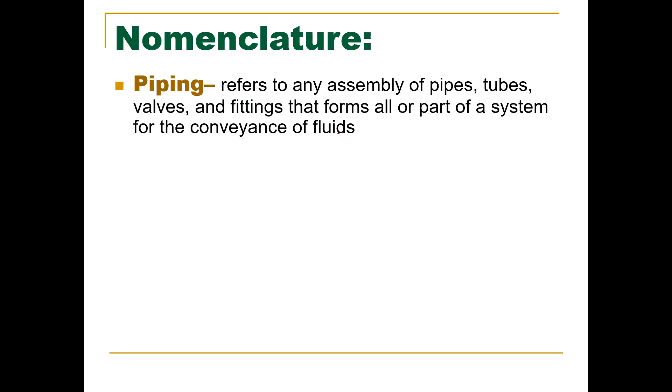All good? All right, so next topic is piping. Piping refers to any assembly of pipes, tubes, valves, and fittings that form all or part of a system for the conveyance of fluids. Pipe refers to the non-flexible fluid conductors designated by diameter and wall thickness, strength, or schedule. Most of the time you will hear it referred to as schedule.

Tubing can be, and usually is, bent at installation. It's more flexible than pipe and is designated by nominal outside diameter and wall thickness. Fittings are devices employed to join sections of pipe, tubes, or hoses in a piping system.

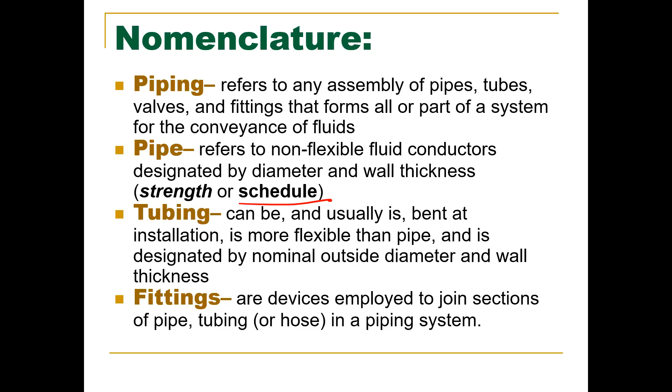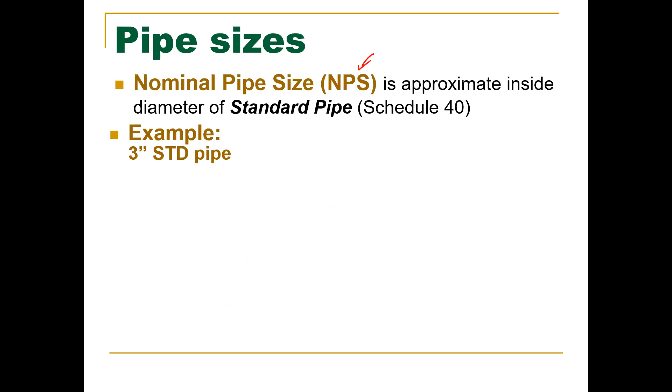Now, nominal pipe size, or NPS, is an approximate inside diameter of a standard pipe. So, Schedule 40 example: we have a 3-inch standard pipe. Its outer diameter is 3.5 inches, its inner diameter is 3 inches, and its wall thickness here is...

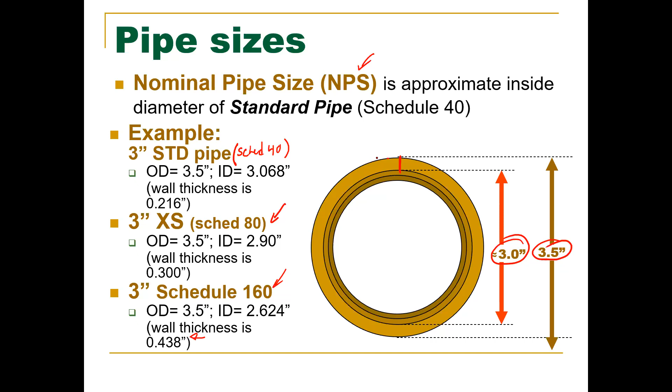0.216. If we go up to Schedule 80 from this Schedule 40, the outer diameter is still 3.5 inches, but its inner diameter is now 2.90. And then we have a 3-inch Schedule 160 with a wall thickness of 0.438. Notice how the outside diameter has not changed, only the thickness of the wall has changed.

Student: When you're talking about pipes in general, do you use the inside diameter, correct? Like just a standard pipe and the thickness? Professor: It depends. A lot of the time, what you're going to be talking about is schedule, which is for the thickness. No one's going to be talking about a 0.216 thick wall, everyone's going to bring up what schedule it is. When you get into the crazy world of wall thickness, that's when people start talking about wall thickness and outside diameter.

And the reason I bring that up is because I worked on a dredge ship. On a dredge ship, we sandblast all of our equipment 24 hours a day, 7 days a week, 365 days a year, because that's our job — we move sand from one spot to another. The entire ship is basically a giant sand vacuum cleaner. We had pipes ranging from about 6 feet in diameter down to something that was 3 feet in diameter, with 3-inch armor-plated steel wall thickness. That was done because we were sandblasting everything, always, continuously.

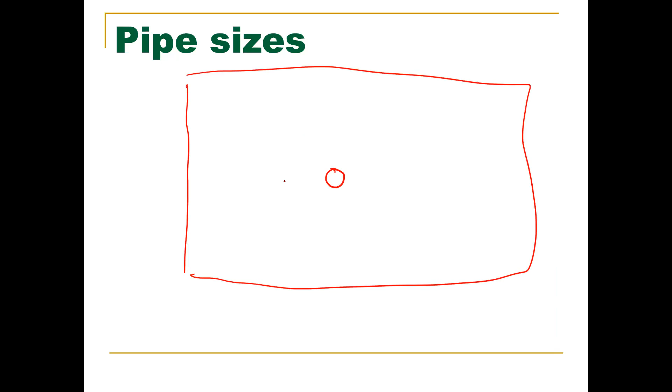Student: Would you do this while the ship's underway or while it's not? Professor: All the time. Student: So how do you replace the pipe if it's that thin, would you just add a layer to it, like a sheath? Professor: Sometimes. If we were doing that job... here, I'll go to this page. That's why it was important that we did these UT scans, because sometimes we would develop a hole or a crack on our pipe. This is our pipe wall with a hole in the side, and what we would have to do is scan all around this crack.

In doing so, we had to find a spot where we could weld. We would grind off this entire area to find it. We would need at least a quarter of an inch to weld. Sometimes this crack would be here, but we would have to put on a 2-foot by 2-foot plate.

Until you find it's actually thick enough, right? Until we can actually weld to it. Exactly. And sometimes when we would grind off paint, we would find little micro holes, little cracks, things like that would develop. It would really throw a wrench in your plan of where you thought you'd be able to weld.

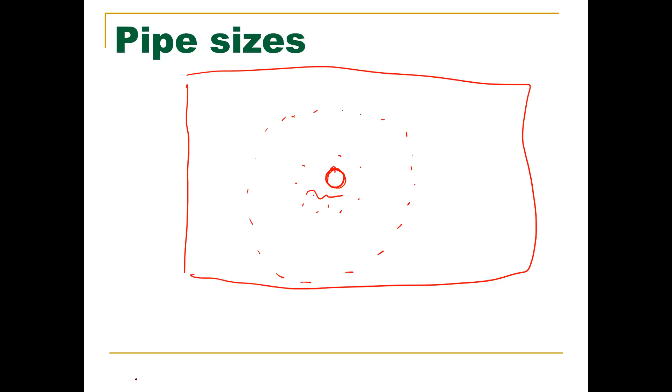Most of the time, if the crack was bad enough—and we've had some really bad cracks—it would shut down the job. We'd have to get our welder, which, God knows, it was always 2 o'clock in the morning when I had to go wake him up. It never happened during the day. We'd have to shut down the entire ship and weld until it was fixed.

A lot of times we had to go into the shipyard.

Quick question: so like a Schedule 40 pipe would be a 3-inch diameter or a 3-inch thickness? So it's not thickness—Schedule 40 is all about the wall thickness. The larger the number, the more the wall thickness increases. You can see a Schedule 160 has a half inch wall thickness, where Schedule 80 is only 0.3, but it's a ratio to what the actual pipe is.

It's not an actual number, it's just the ratio to the size of the pipe, right? Pretty much. Okay, gotcha. Because if you had like a quarter inch pipe and it was Schedule 40, well, a wall thickness of 0.25 is pretty close. So it's always going to be a ratio off of what it is. Schedule 40 is always going to be the smallest, but it's standard, and then you go up to higher and higher.

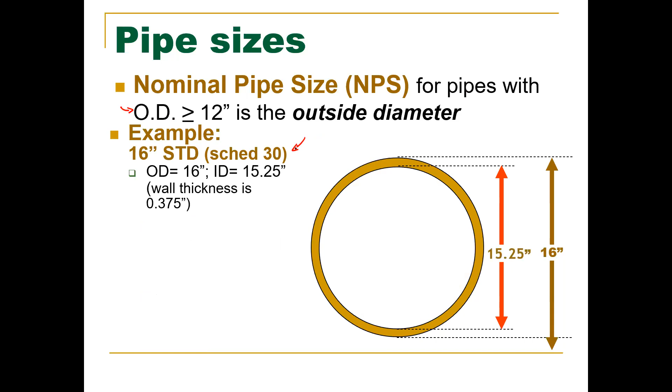For pipes with an outer diameter greater than or equal to 12 inches, it is done by the outside diameter. So Schedule 30 of a 16-inch pipe—the outer diameter is 16 inches, where the inner diameter gets smaller, and so on and so forth.

So Schedule 40 basically has a full half inch thick wall, and then Schedule 160 goes down to a 1.5 inch thick wall. Notice again, this outside diameter has not changed.

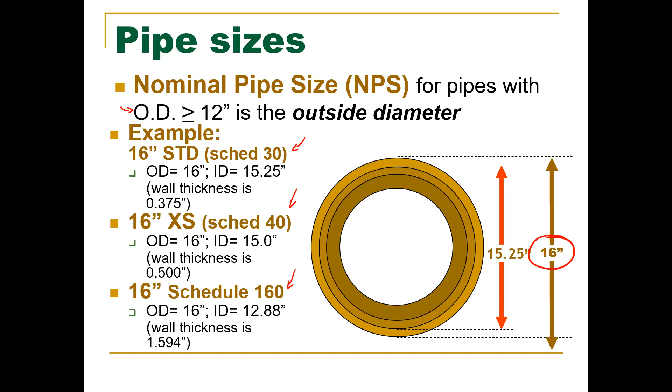So outside diameter in 16ths: a number 12 tube has an outside diameter of 3/4 of an inch. A number 16 has an outside diameter of 1 inch. Most of the time, people aren't going to go with number 16 or number 12—it's going to be a lot of just its outside diameter, or also this wire gauge, which they'll talk about. The wall thickness is in a decimal or in the BWG wire gauge number.

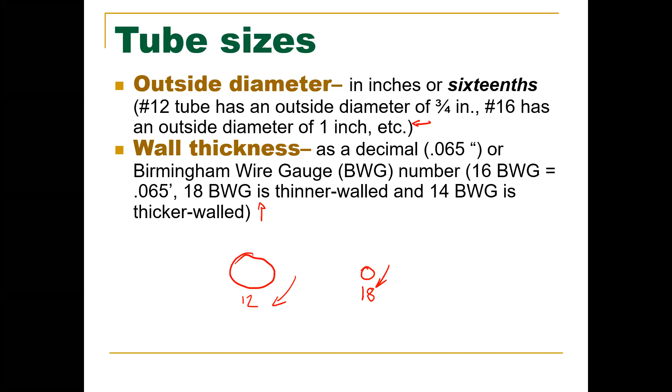Same thing with wire gauge: 18 is going to be a small wire, thin walled. Or if you have a 12 gauge, it's going to be a thicker wire, thicker walled. So the smaller the number on the wire gauge, the thicker the wall and the thicker the wire. The higher the number, the thinner the wall, and the smaller the diameter of the wire. It operates the same way.

Copper tubing kind of falls into its own category. It's still considered tubing, not really pipe, but it also utilizes fittings, whereas tubes utilize bends to go 90 degrees. Copper tubing can use either bending or fittings, so it's in its own category of both.

It's designated by slightly different parameters as well—it utilizes the nominal outside diameter. So a 1-inch copper tubing has an outer diameter of 1.125, but it's called a 1-inch pipe. Same with 3/4, 1/2 inch, and all that kind of other fun stuff.

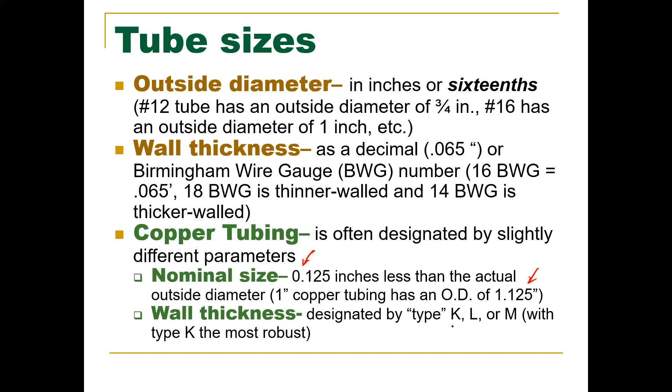Wall thickness is not designated by anything other than a letter - K, L, or M - with K being the most robust. So it has a thicker wall. The material it's made out of can take a little bit more of a hit.

The example I use is I just had to replace a half inch copper line in my garage that goes to a water spigot. Because it's exposed, I wanted a tougher type of copper, so I went with K because it's outside - well, not fully outside, it's in the garage. It's an attached garage, but if we forget to turn the water off in the winter, it will have a lower chance of freezing and busting the pipe open because it's using a thicker wall, it can take more forces.

The other thing is that it's exposed, so it can get damaged, and we don't want this thing to get all banged up, like when we hang things or get the car in, stuff like that. So we went with a type K so it can take those damages. So things to think about - it's not just about wall thickness, but what it's going to stand up to.

So, we use mostly the type K. I'm sorry, say again, you're breaking up. I'm saying, we use mostly the type K, since it could be outside. So I used all type K in that piping - it's the most robust of it.

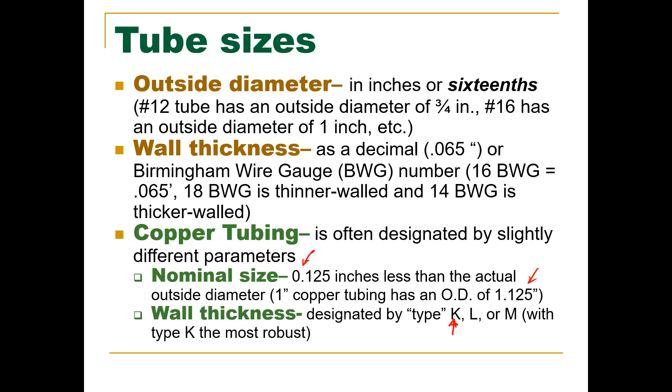So, piping connections - we can weld them. This is called a butt weld. It utilizes a V groove, grooved out at about a 45-degree angle.

Most of the time when you buy a piece of pipe, both ends will be V grooved, unless otherwise designated - you would have to go buy something that's not V grooved. If you cut a piece of pipe to length, you'll have to V groove it out yourself. There's no special tool, it's just a grinder.

This V groove is there for a specific reason - it allows you to stick an actual welding stick into the area. It gives you more surface area to get that weld on. If you were to just weld on two pieces of material flat up against each other, you would not have enough surface area and it wouldn't give a nice deep hold - you wouldn't have enough penetration into both sides of the metal.

Mr. Callahan, what's happening? Would you say that the V groove might make the weld a little bit weaker, considering it's not completely welded straight through? Because the way I'm looking at it, that groove there - if it was completely welded from one side to the other, I would think that groove being there might not make the weld as structurally strong.

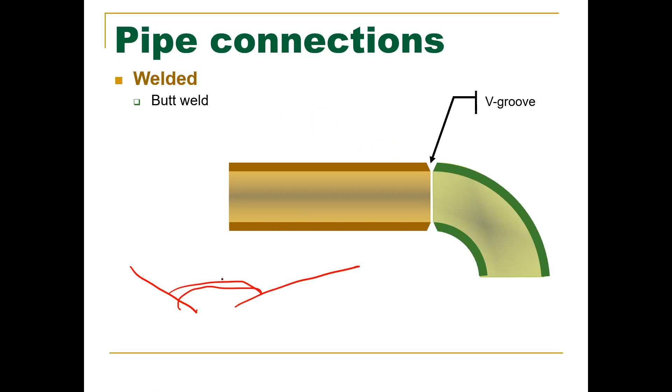So a wider area equals a stronger weld? Not always. It's not like you'd have a 22-degree angle with this long bead. But there is a point of no return. Just given that surface area, you'll be better off. A lot of the time you can actually have spots where you'd do a triple weld, where you'd have a base bead and then put on two more beads to increase your surface area and spread it out. Okay, got it. Thank you, that was a good question.

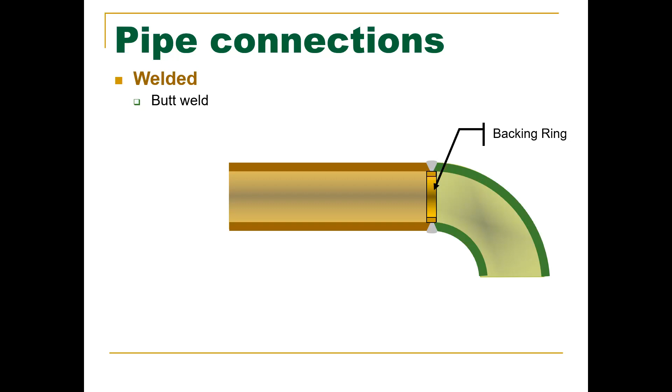There's something here called a backing ring. Anybody who's taken the welding class can say different, but never in my life have I seen a welder, or myself, use a backing ring. Never. From what I can tell in my own research, backing rings are basically there to keep the weld in place. But in reality they are consumable, you can't reuse them. Because if you're welding a pipe together, are you going to be able to reach in there and grab that backing ring out? No. So it's pretty much worthless. I've never seen anybody use it.

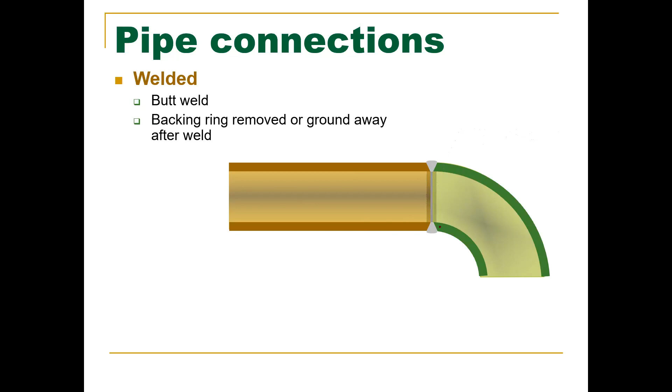So the weld itself is in there, it goes all the way around the pipe, in that V-groove. Another way, which you tend to see a bit more these days — not so much these V-grooves, they still exist — is some sort of collar. You can see there's no V-groove. You can cut piping easily, you don't have to worry about grinding anything away, it's just a straight cut and welded up.

Now you can see right here there's a little space, a little air gap there. What is that for? For a seal or a gasket, maybe? Nope, it's not for a seal or gasket. Remember, this is the actual seal, there is no gasket, this is a welded seal. Is that for the weld to seep in a little bit, to get into the actual area? Or so it doesn't bind the pipe there, like to replace it if you need to, I guess?

Not for replacement, and it's not for the weld to seep in. If the weld seeped in here, you could have a problem where you'd have weld dripping in, blocking your flow. Does it have to do with expansion and contraction with temperature? Exactly, just that little bit of room for expansion.

If you're turning this on — this is a boiler — we have 600-pound steam coming out of here. Turning it on for the first time, let's say it's summertime, more than likely it's a cold ship, probably 70 degrees, this piping is cold to the touch. We have 600 degree steam coming right through this. What's going to heat up first, the piping or the fitting? Yeah, the piping. And it'll be a gradual heating up, not instantaneous.

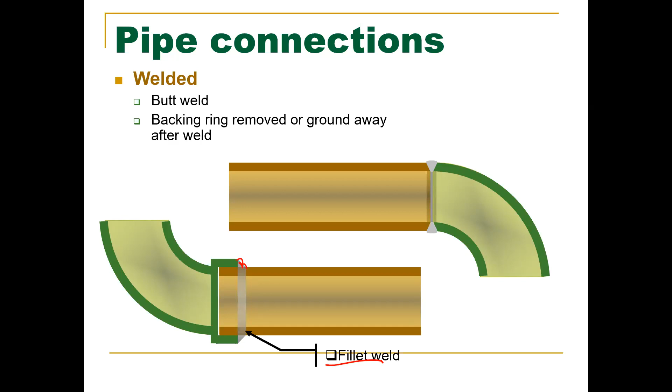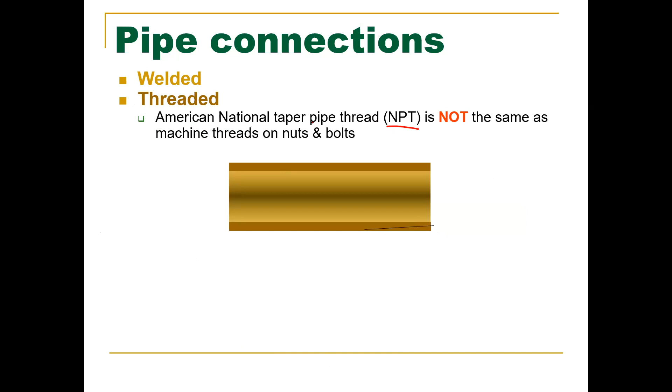Now we have threaded. Threaded is using the American National Taper Pipe Thread, or NPT. It is not the same as a machine thread for bolts, nuts, and all that kind of stuff. We notice we actually have a slight taper to our threads as well. Now, for nuts, bolts, machine threads, that's TPI for anybody who's curious. Threads per inch.

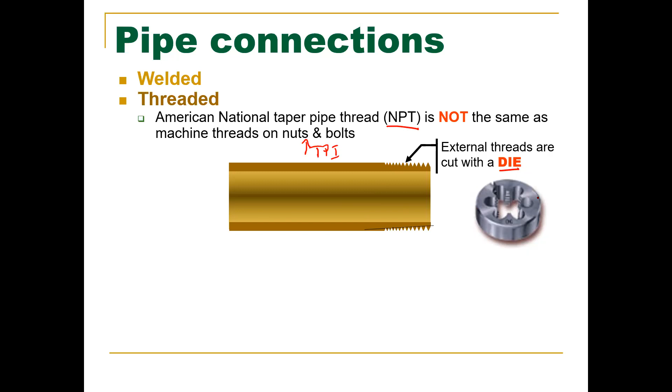So external threads on here are cut with what's called a die, D-I-E. It utilizes internal threads to cut the external threads of a pipe.

So if you ever made your way into the machine shop on the ship or in the classroom on land, you'll see these hanging on the wall. That's basically where the die gets inserted. They are ratcheting, so that way you don't have to swing these things around. They tend to be very big and large, because cutting taps and cutting threads is not the easiest thing in the world, so you'd need a lot of leverage.

And then you have what's called a tap. Taps cut with an external thread to make internal threads. And we can see right here in this space and in this space, we're missing threads. It's actually pulled back away. Why do we have that? So the metal shavings can get stored in there while it's being tightened and loosened so that it doesn't affect the threads being cut. Exactly.

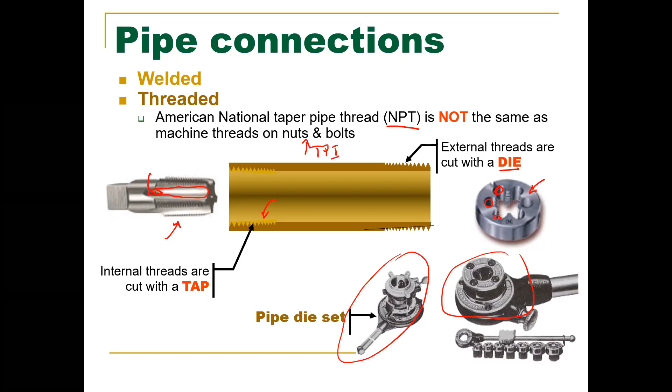So we're removing material. It just doesn't poof off and go to Neverland. We are removing it. It needs to go somewhere. All right, that's our threaded.

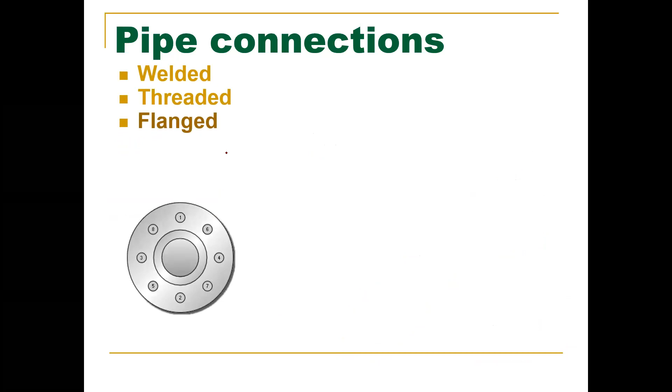And now we have flanged. Flange is usually what you'll see the most on high pressure and low pressure systems, especially if it was built by the shipyard. Welded is for fittings and stuff like that, but for like straight pipe, you usually tend to use flange. So flanges are great, but they are kind of in their own little specialty.

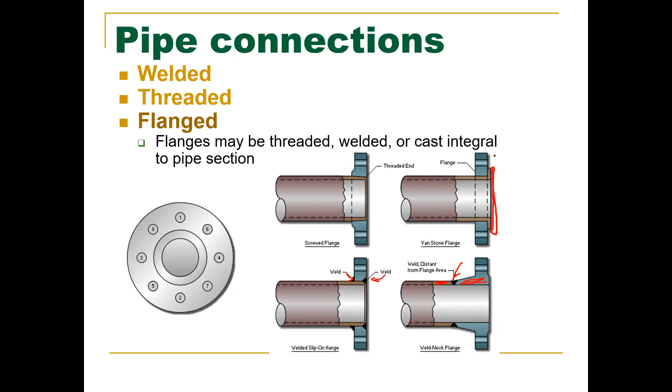Now, with flange comes gaskets. This is the spot where we see our first gaskets. So for LP, low pressure, you can use rubber, paper, flexible graphite, synthetics, things like that. For paper, the world's best gasket material is charts, old charts. So if there's any mates in training here, and someone comes asking you for chart paper that's an engineer, don't be alarmed. This is what they want to use it for. It makes fantastic gasket materials. And if you need a wrapping paper, it does really well for wrapping paper too.

They are done with bolts and nuts. Now you can see the animation there. Watch the animation on this side. You see how those are turning gray? And they're going in what's called a star pattern. Why are we not just going in a clockwise pattern? Why would we go in the opposites?

It needs to seat properly. Exactly, even. And so it's even. Yeah, even tension, like on a wheel on a car. Exactly. If we didn't do that and we had two flanges like this, and we did all the bottom ones first, we would end up splitting it and making it a V, and now all the fluid is just going to come out of the top, or the bottom, whatever side you decide to start on.

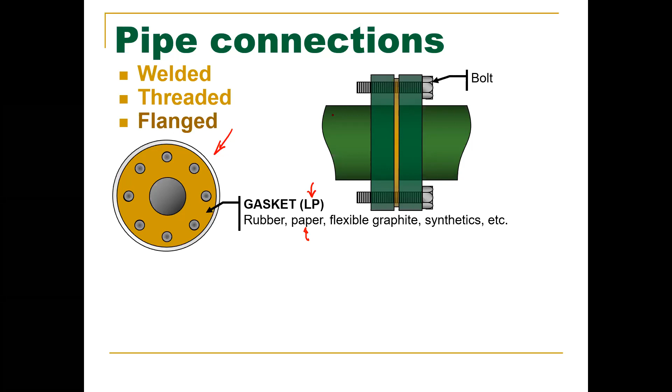So it has a bolting pattern, not only for insertion, but also when you are actually tightening it down or torquing it down. Low pressure sides can use a bolt and nut. You can also use a stud with two nuts on either side. But with high pressure, you have to use studs. Again, here's your bolting pattern. 1, 2, 3, 4, 5, 6, 7, 8 right there. Pretty much a star pattern. Always just do your opposites.

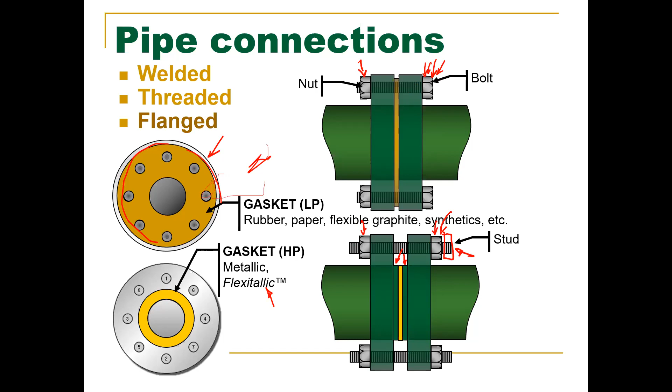We are training to be engineers on a ship, not on land, right? So what happens when you're on a ship and that ship hits a wave and all the way in the bow, and the engine room's way back here? What happens to the ship? Is it all going to move at the exact same rate? It's going to deform. It's going to twist. It's going to contort in two different directions sometimes.

So if you had a straight piece of pipe and something's just going to basically twist it like that, what do you think is going to happen? Snap or break or something. It's going to snap or break. Exactly. So remember, just because we're thinking things are not going to move, we have to remember everything is dynamic—it all moves, sometimes at different rates, especially on the longer ships.

This might be physically attached to a bulkhead and not actually a piece of equipment, and that's going to move like hell compared to what is happening as far as equipment. When you guys get out on sea term, go down to that shaft alley when we're in some rough seas—you'll see the entire thing shifting and turning in almost two different ways. It's pretty cool.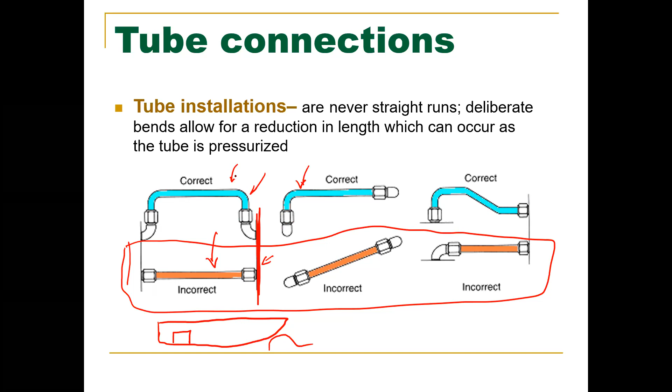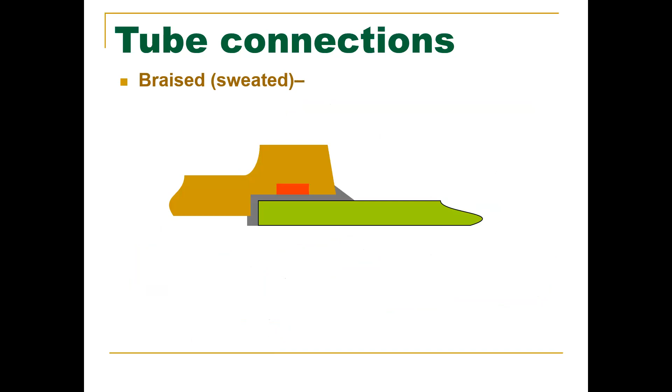So tubing connections, we got brazed, or sweating. So has anybody here done any sort of soldering, whether it be electronics or with copper tubing? Microelectronics, like little things. So the big thing is, if you've done copper tubing, you'll understand this, same with soldering.

So when you're soldering two pieces of wire together, and they're all that stranded wire on both sides, and you want to solder these two things together, you twist them together so they form like a bundle. Now here's the big thing.

How do you know the solder is going to get everywhere? Because that's what you want. You want a really strong electrical connection. You don't want just the outside to be soldered. You want solder within the entire thing because you want the electricity to pass through. If it's a 12 gauge wire, you want electricity to pass through the entirety of that gauge, not just the outside or where it's making contact. So we're trying to make a physical contact here. What do we use?

Flux, right? Use flux. And flux has a great property to it. Who here has used flux with any piping connections when soldering? I have. What does it do when it heats up?

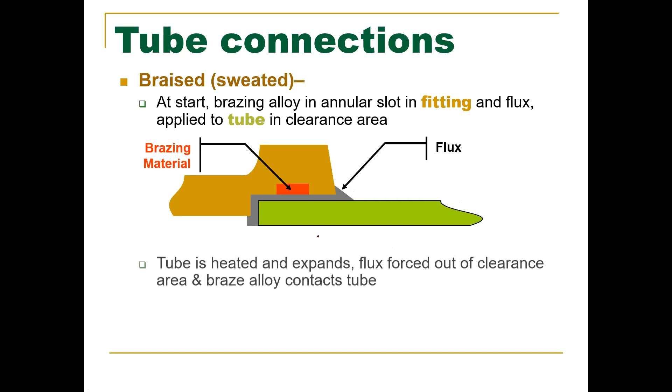So if we look right here, the tube is heated and expands. The flux is forced out of the clearance area and braze alloy contacts the tube. The fitting is heated and the clearance area opens. The flux and alloy flows out, and it'll follow that flux because that flux is trying to boil off right now. Both the tube and the fitting are now heated as the alloy flows, it basically penetrates the entire area.

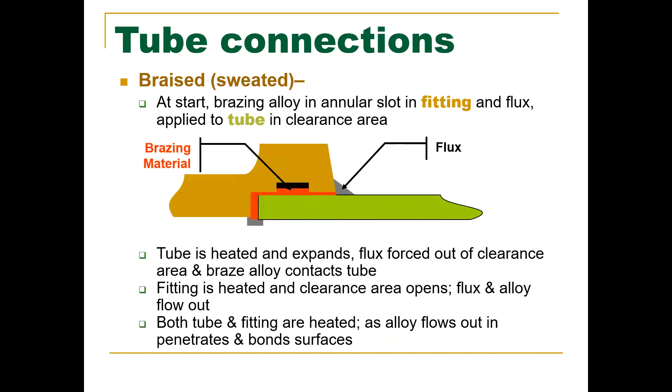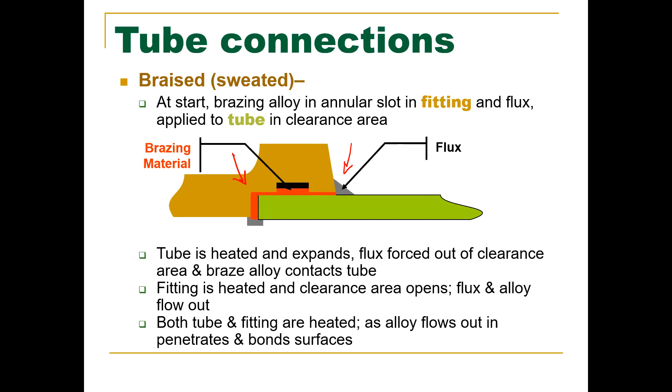So the same thing, it's basically what you're trying to do is heat the entire thing. As that flux starts to boil, you're going to add your solder. And because this fitting is thicker than the pipe, you want to heat that more, which will allow, when you put that solder into it, that solder will follow that flux and fill that entire crevice. Again, this isn't a welding class. Just know that for sweating, flux, and all that idea, that's what it's there for—not so much the method, but why.

Quick question. What kind of piping would we usually use stuff like that on? Because it sounds like it's kind of more of an electrical thing. It's used on copper. Pretty much exclusively copper.

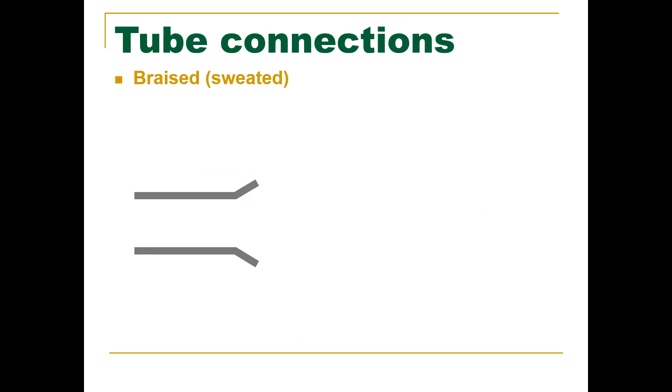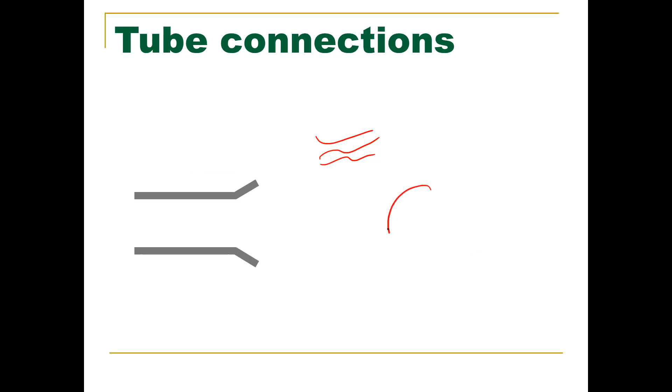I was bringing up electronics because when you think about it, when you're putting all those tiny wires together, you'd have a crevice that nothing would get into, and flux would flow into all of it because it turns into a liquid. It's the same thing on the outside of a pipe. If you have flux on the outside of your pipe and you heat it up, it will start to become a liquid.

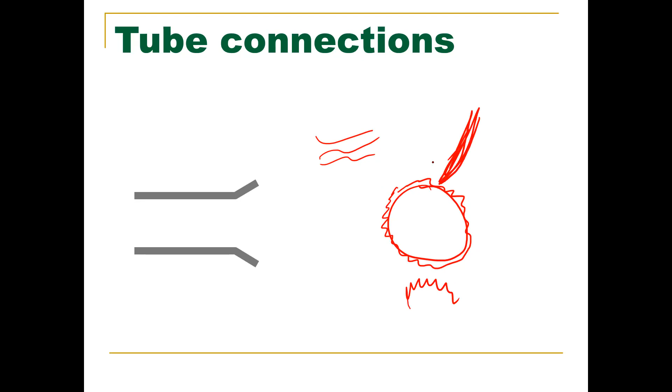And then as you add the flux to the outside - that's my flux stick - it becomes liquid. Gravity will flow, and it will flow downwards towards the heat, and the flux will go that way. The solder will follow it.

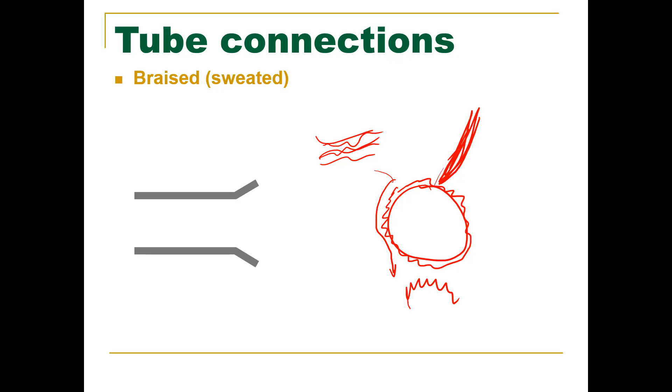The wire analogy was because you can have that whole wire - basically it's the same idea, just using a different type of solder for a different application. But we're not using wires here, any kind of electrical equipment, this is just for piping. It's more to picture it - if you were to have those pieces of wire, how would you be able to penetrate deep into it?

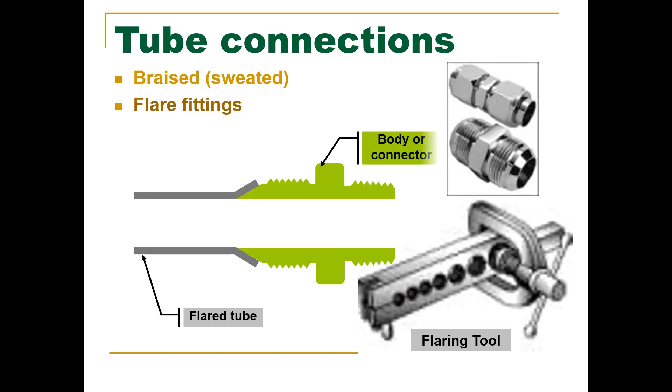So we also have flare fittings. This is my flare fitting tool that I have right here. It's the same thing as the one in the picture.

You put these two pieces together with your tube inside of it, your copper piece of tubing. And those two pieces will now flare out whatever copper is in there - it will push the material and actually force it to become flared. So you can see that it will flare out this tube right here and here using those two tapers.

Now, a lot of engineers don't like these. Why do you think we wouldn't like these as engineers? They work for a little while, but they don't work as long as other pieces of equipment out there. Does it create weakness in the bend?

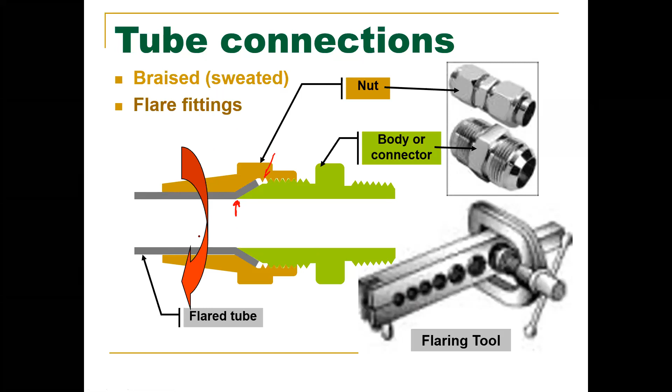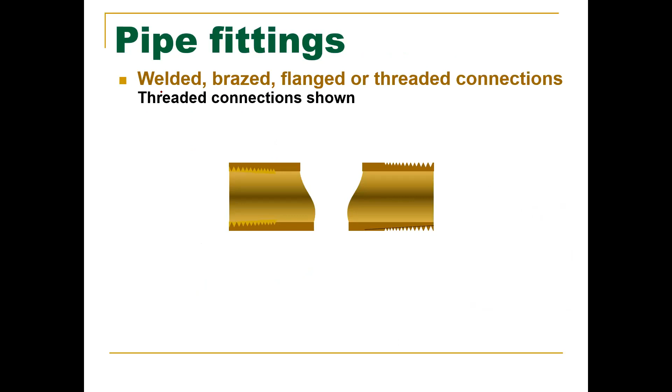So we have welded, brazed, flanged, or threaded connections. These are our pipe fittings.

This one right here is a cap. The cap uses internal threads to cap off and stop the flow. And then we have what's called a plug. A plug uses external threads to stop the flow.

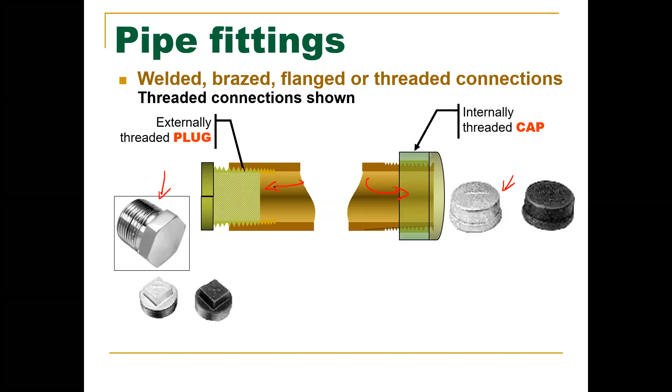Now, if we have two pieces of pipe that are equal size that utilize internal threads, we use what's called a nipple. Those have external threads that screw into both sides of the internal threads of your piping. These can come all the way up to 6 inches, and down to a little bit of a quarter of an inch.

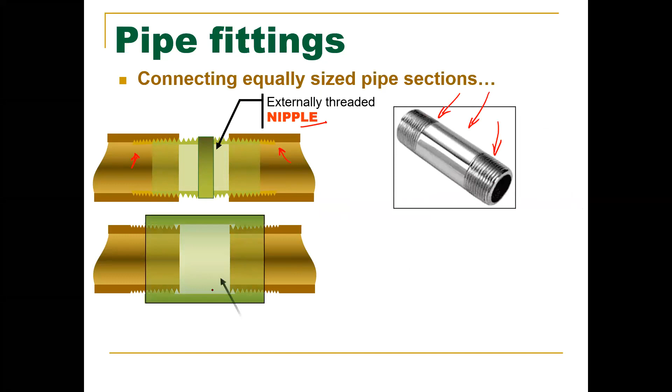Next up is a coupling. The coupling uses internal threads to connect to the external threads of your piece of pipe.

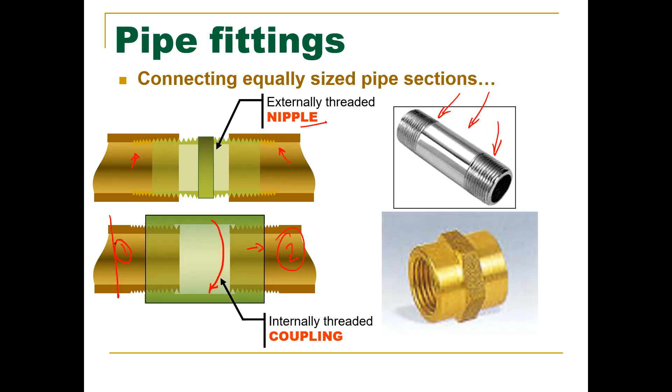Now, what happens if I rotate this coupling this way to tighten down onto side number 2? If you tightened it towards number 2, wouldn't you loosen it off number 1? Exactly. But that's only if number 1 is structural into the wall or attached to another piece of equipment. If number 1 can free spin, then it's fine to use a coupling. But this is where unions come into play.

What if this happens a lot? You have 2 pieces of pipe connected to 2 different walls, or a piece of equipment and into a wall. You've got to connect them, but if you use a coupling, one side's going to tighten while the other side loosens. Or it's not even connected to a wall, there's just 30 feet of pipe that you don't want to remove for it to free spin on side number 1. In order to attach a coupling...

This allows you to break into 2 pieces. It utilizes 3 pieces: one gets screwed onto here, the other gets screwed onto the other side, and our third piece, which is the collar, screws both of those together utilizing these threads right here. It makes a metal-to-metal contact to seal. That taper right there and there is what seals it.

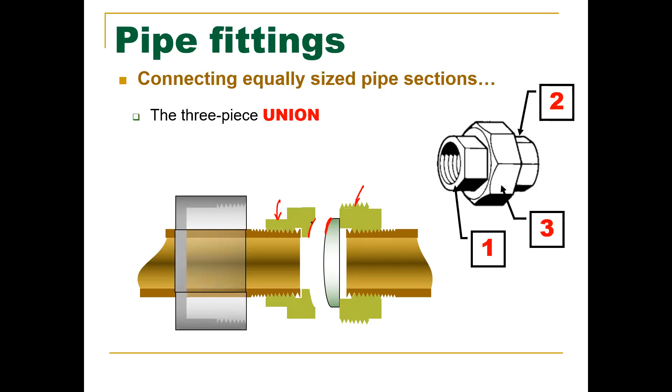I have some actual pictures that you'll see after we finish this PowerPoint.

Is that like the P-trap under a sink? Like they have it's like a coupling like that? The P-trap uses basically, it's not really a coupling, but yes, at the same time it could be, because it's not really technically 3 pieces. That U-bend is one side of the piece. So yeah, yes and no.

So it's a run of piping that can be opened without removing large sections of pipe. You can break 2 sections of pipe utilizing a union.

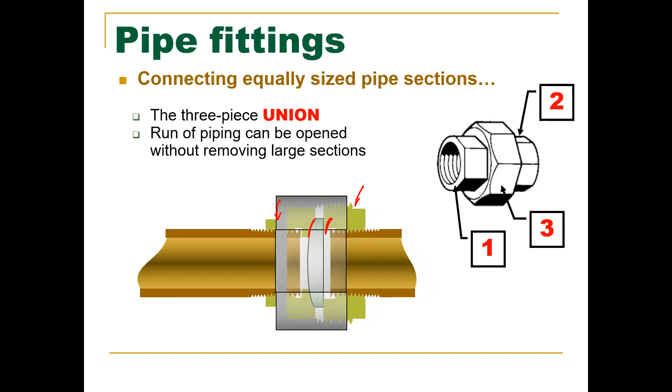If we want to connect 2 pieces of pipe that are unequal in size, we use what's called the bushing. It has external and internal threads.

Now, if we need to go from something that has an external thread to an external thread, but they're two different sizes, we can use a bell reducer. That utilizes internal threads on both sides to connect the two pieces.

Remember, all of these things are being connected. The only thing that's metal-to-metal contact, a metal flush to metal flush seal, is our union. Everything else is basically sealed by threads.

We want to connect multiple pieces of pipe. Can you go back on that one slide?

The bell reducer, does that gap stay like that, or does it actually connect? So there's always this gap here. I have a picture that I'll show you guys that actually has physical bell reducers, but these threads are what's making the seal. These two pieces of pipe will never make contact with each other. See it like right here, they're not making contact on the actual bushing. They're making contact via the threads, and that's what's physically making our seal.

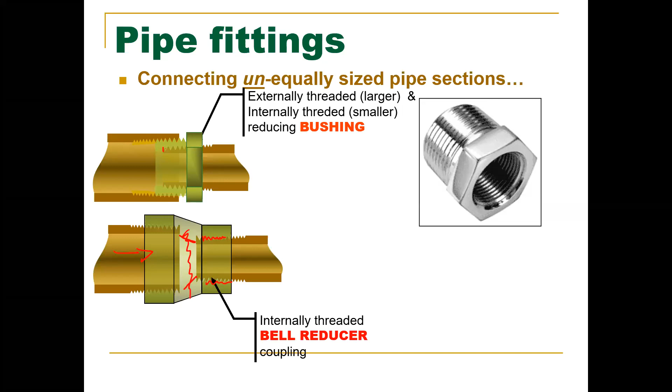Now, do they have unions that are also bell reducers in case those two pipes are fixed? Basically what you would have to do is cut it farther back, thread it, and then do a union plus a bell reducer to get to the proper size. That would be like extreme specialty equipment. I'm sure it's out there, but it would be really specialty.

So if you're going to connect multiple pieces of pipe together, because you're not just going to have one straight long piece of pipe forever, we have what's called a tee that does 3 different pieces that can join.

We have a reducing tee, which one side is going to be smaller than the other. So if you want to add a piece of chemical to the flow of water or what have you, a lot of these times the reducing T will have a 1-inch piece of pipe over here and it'll split off to 2 1/2-inch, so you get even flow going into both directions. So you can see that as a reducing tee.

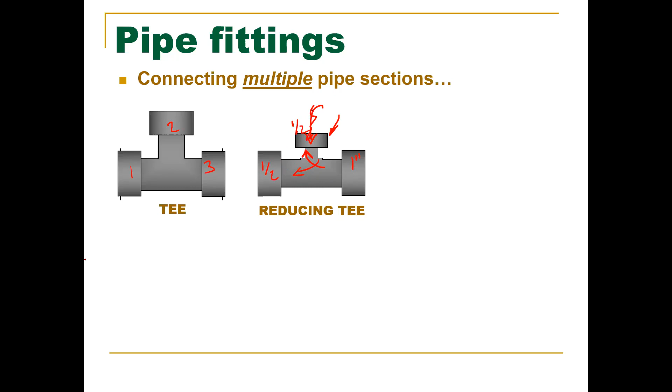You can have a side outlet tee. This has 4 different areas where it can actually have fluid coming in or out. Again, here's a cross. It has 4 as well.

We can have a Y bend or a Y branch. You see these all the time on firefighting equipment, so look to the ship. One side will be connected to a hose. The other side will just be there.

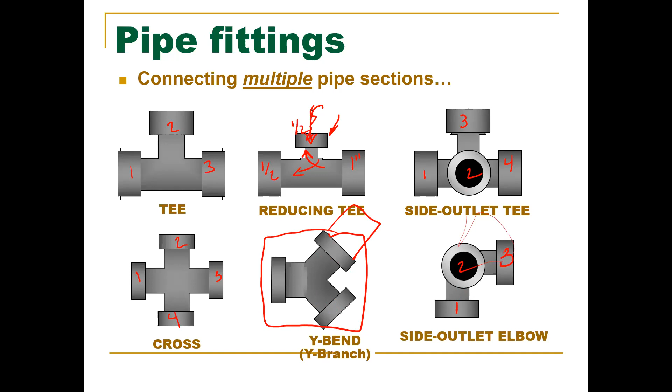And then we have side outlet elbows. This has 3 different places where fluid can enter or leave the system.

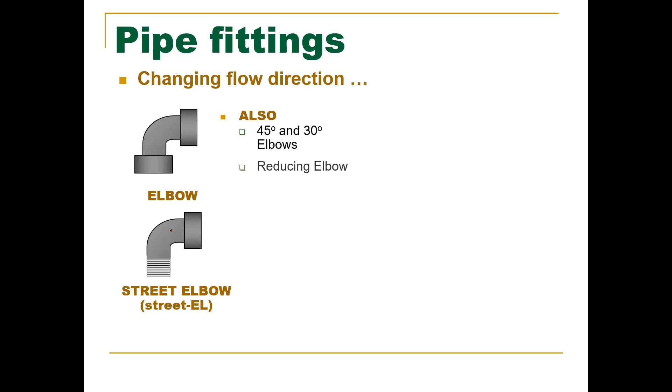We want to change the flow direction, we have elbows, and we have what's called a street elbow. Street elbows are pretty much very specialty used. Most of the time you'll use an elbow like this.

Street elbows can be used in a spot that you don't have as much space. So if you don't have the physical room to have an elbow on the outside, like this big piece of material here, this goes inside of the pipe, like that.

So a lot of the other times is that you don't have the vertical height either. This distance to this distance on a regular old elbow is longer than this distance to this distance. So it gives it just a little bit more short, and sometimes that's all you need.

Is that threaded on the bottom? So how would you tighten it if it was threaded? This right here is threaded in, so you basically screw it in until it achieves the correct direction that you want it to be. If there wasn't enough space for the regular elbow, how would you have enough space to screw it? Well, if you're in a spot like a little tiny corner, then you're really screwed. That's soldering time. But it's more about the space.

Like maybe you have a piece of pipe that's rubbing up like right here, where this can still free spin, but you can't physically get it because there's that pipe right there. So it just allows for that area where you may not be in a spot where that little bit of material there, you just can't have it.

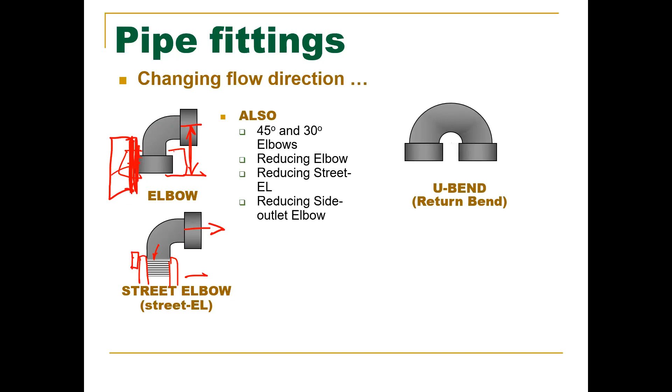And of course, these elbows come in 45s, 30s, reducing, all the other things that we saw already. We have U-bends. We have a U-bend with a back outlet. So that outlet could be like a little bit of fluid going that way, or again, if you want to add maybe a chemical to a water stream.

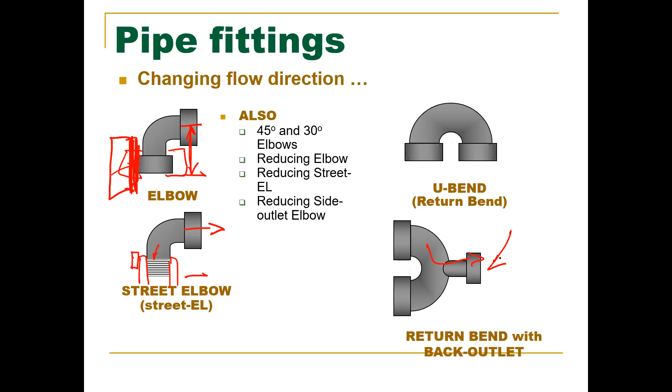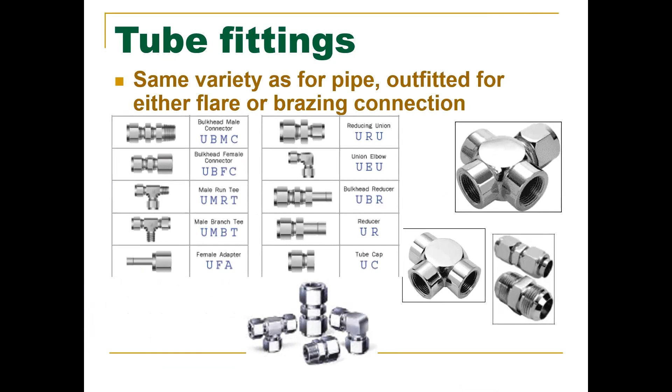And then, of course, with tube fittings, it's literally all the exact same as pipe fittings. They come in all the same shapes, sizes, all that other fun stuff. One last thing before we begin this quiz.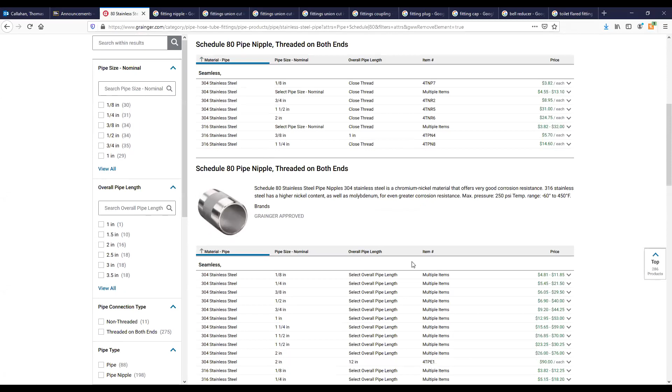Here's more of what you can see of schedule 80, comes in 1/8, 3/4. You can see the overall pipe length, and you can choose a different pipe length. The longer you get, the more you have to figure out what you're going to be getting. This is stuff you have to look at when you're ordering.